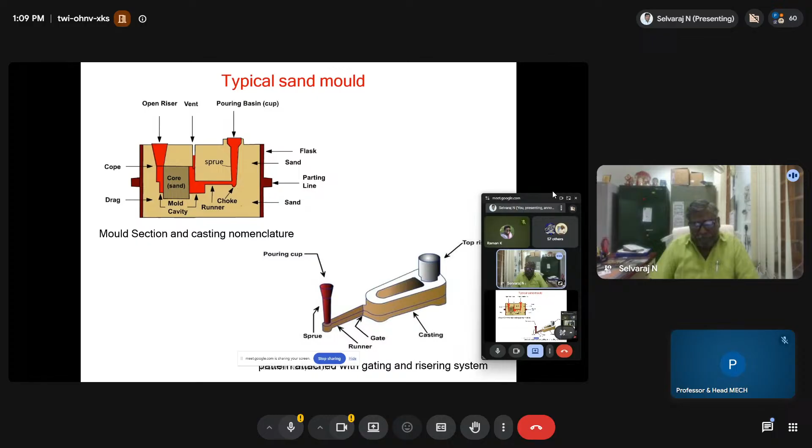As you know, this is the fundamental of the casting process. But the casting process has some drawbacks and some advantages also. These are some of the products which are produced by mold casting. The main advantage is that molten metal can flow into very small sections, so intricate shapes, even at a very micro level, can be made. As a result, many other operations are not needed. It is practically useful for ferrous and non-ferrous metals.

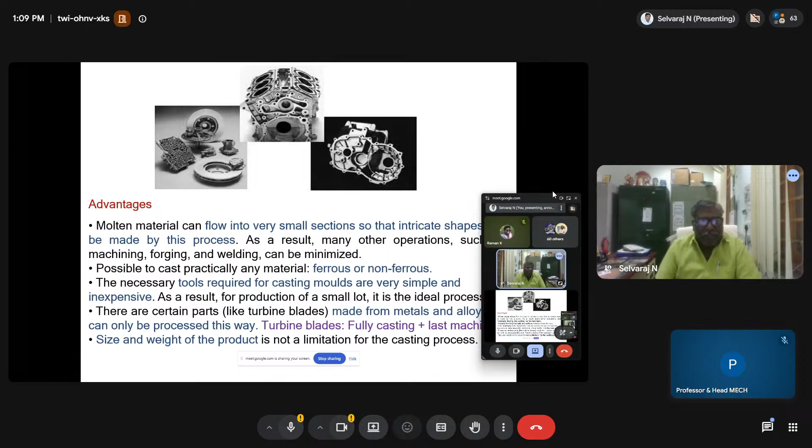The necessary tools required for the casting mold are very simple and inexpensive, which are the main advantages. And we are able to produce many applications. Mainly, see the diagram: some of the turbines are made by the casting process also. They have a lot of advantages. It has some drawbacks also. Mainly, the dimensional accuracy and surface finish may not be up to the mark.

Nowadays we are talking about the micron level and nano level, which we are not able to obtain from the casting process. Many new casting processes have been developed which take into consideration dimensional accuracy and surface finish. Some of these are the die casting process, investment casting process, vacuum sealed molding process, and other molding processes. So in order to overcome the limitations of the conventional casting process, scientists have developed some new techniques or advanced casting processes, which we are going to see in the coming slides.

So mainly we are concentrating on two latest processes called the stir casting process and the centrifugal casting process. There are certain drawbacks in the conventional process we have discussed just now. To overcome the limitations of the conventional process, people have developed this area. Let us see first what the stir casting process is. Generally, the stir casting process is useful when you are going to prepare specimens of composite material. That means more than one material.

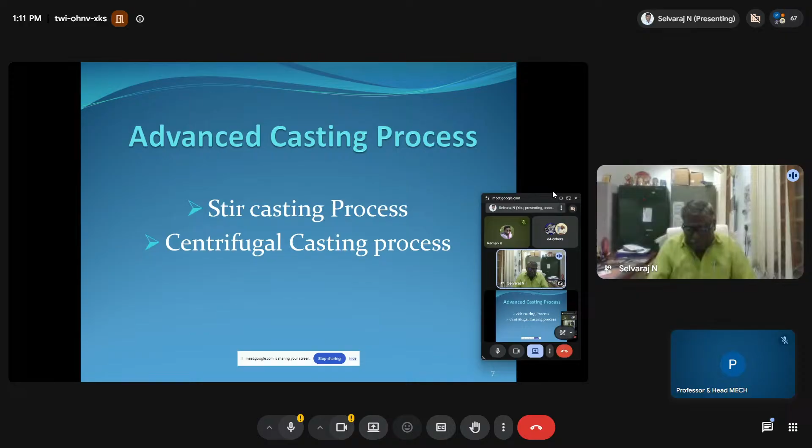So whenever you come across composite material, people go for this kind of process, the stir casting process or centrifugal casting process. If you have only one metal, any non-ferrous or ferrous metal, people used to develop the product from the conventional process. Whereas here, we make composite materials using the stir casting process, which we are going to see in the coming slides. Before we see what the stir casting process means and how we produce the specimen, let us see one or two slides on what we mean by composite materials.

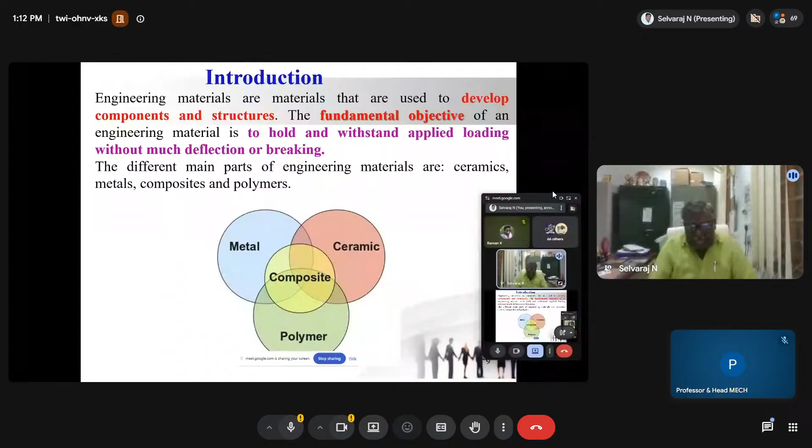Engineering materials are materials that are used to develop component structures. The fundamental objective of any engineering material is to hold and withstand applied loading without much deflection or breaking. Right? For ceramics, metals, composites, and polymers. So we see in the diagram metals, ceramics, polymers, and their combination, composite materials. So a composite material is nothing but a combination of more than one material, prepared with the help of a matrix: metal matrix, polymer matrix, or ceramic matrix. If you choose a polymer matrix, there are two subdivisions, namely thermoplastic matrix and thermoset matrix.

Composite materials are classified based on reinforcement: structural, fiber reinforcement, and particle reinforcement. Structural reinforcement is generally in terms of laminate and sandwich. In laminate, layers are placed one after another. In fiber reinforcement you have continuous and discontinuous. In particle reinforcement you have large and dispersed particles. So you can classify composite materials based on the matrix or based on reinforcement.

So what do you mean by composite material? In the classification you see metal matrix, ceramic, and polymer. Metal matrix will have metal as the matrix material and the reinforcement as a ceramic or organic component. Whereas ceramic matrix has ceramic as the matrix material with metallic reinforcement. Coming to polymer matrix, we have polymer as the matrix material and the reinforcement is in terms of fiber or particles.

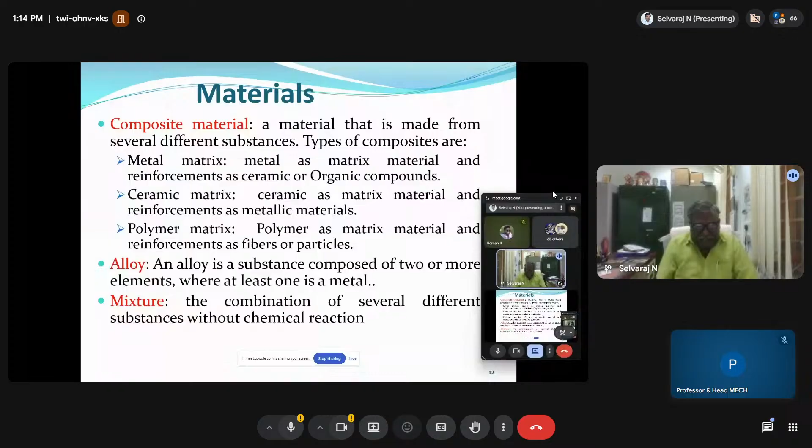Whereas in a composite material, the matrix is a monolithic material into which the reinforcement is embedded and is completely continuous. Reinforcement material is embedded into the matrix. So that is the basic difference between these two.

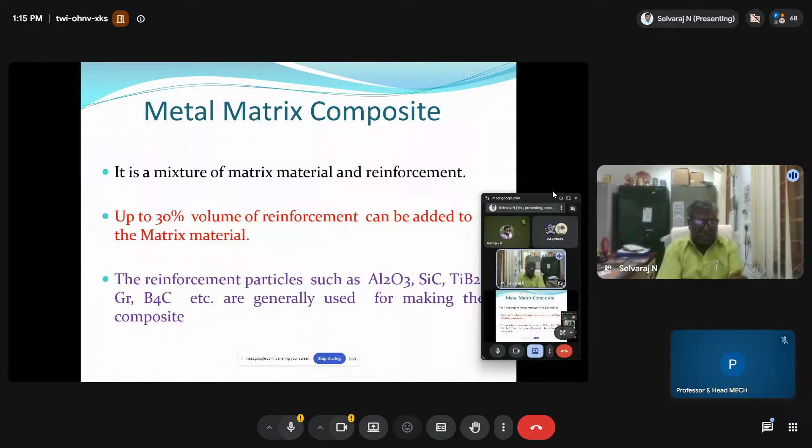Now coming to metal matrix composites, up to 30% volume reinforcement can be added to the metal, up to 30% only. 70% generally is base metal, maximum 30% can be added as reinforcement. The reinforcement materials are generally aluminum oxide, silicon carbide, titanium diboride, graphite, boron carbide.

When at least three materials are present, it is called a hybrid material. Generally they have two materials, one is the base metal and another material, that is called a composite material. But if you have more than two, three materials, then it is called a hybrid composite.

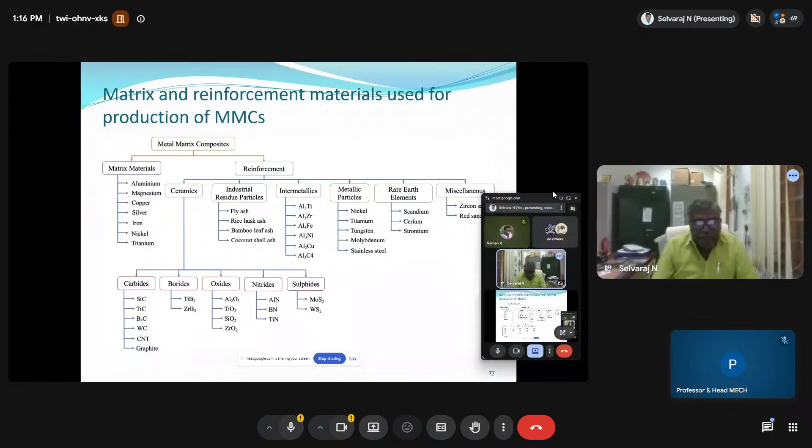This is a generalized classification of metal matrix composites. Based on the matrix we have aluminum, magnesium, copper matrix, and for the reinforcement we have ceramic, intermetallic, metallic particles, elements, rare earth elements, miscellaneous, etc. Coming to ceramics, again there is some classification: carbide, boride, oxide, nitride, and sulfide. These are some of the materials which are used in MMC.

So the main difference between an alloy and a composite lies in their composition, structure, and how the constituent materials are combined. An alloy is a homogeneous mixture of two or more elements, where at least one must be a metal. The elements are combined at the atomic level, usually by melting them together. Alloys typically form a single solid phase, where atoms of the different elements are uniformly distributed through the material.

Whereas a composite material is a heterogeneous material made of two or more distinct materials known as phases. They remain separate and retain their original properties in the final product. The properties are not lost when combining them. By combining the individual properties, we finally get enhanced strength and overall properties. That is the main advantage of composite material. The components do not dissolve in each other, but instead combine to achieve improved properties like strength, toughness, and light weight. That is the basic difference between composites and alloys.

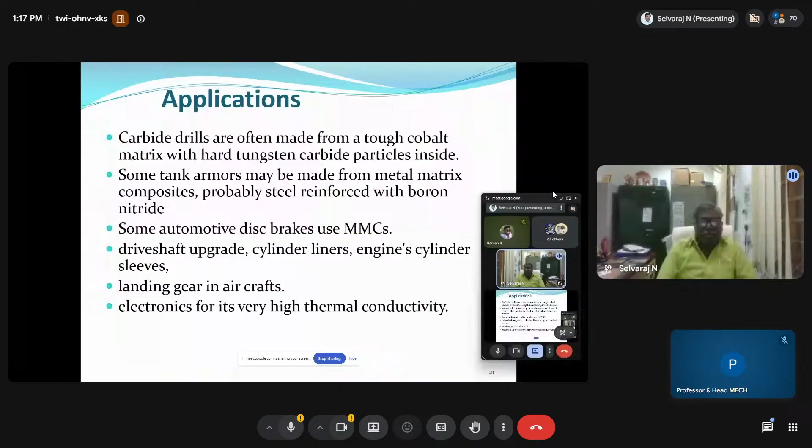Now, assuming that we know what is meant by MMC, how are we going to prepare the MMC in the stir casting process? In the liquid state process, we have casting and infiltration. Stir casting: discontinuous reinforcement is stirred into the molten metal, which is allowed to solidify. Squeeze casting: molten metal injected into the form with the fiber preplaced inside. Spray deposition: molten metal sprayed onto a continuous fiber substrate. Reactive processing: chemical reactions. So we have nearly 4 or 5 methods to prepare the specimen, but today we concentrate on the first, the stir casting process.

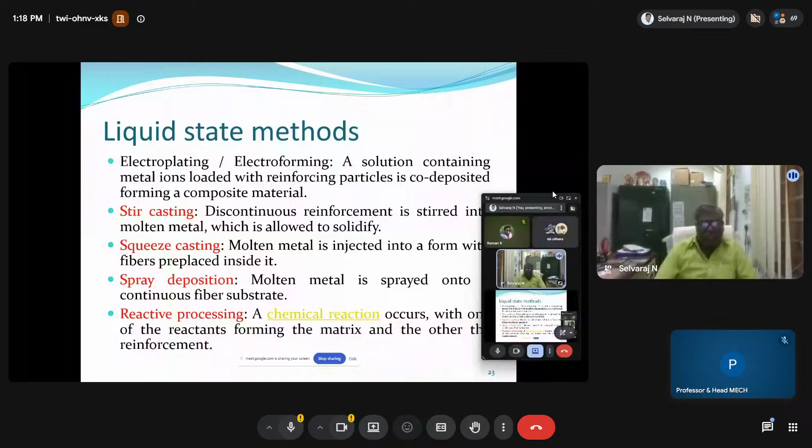Okay. If it is not audible to the audience, please tell me so that I will recheck it once again. I think it is audible. Please respond. Yes, sir, it is audible, sir. Okay, thank you, thank you.

Stir casting is a liquid state method of composite material fabrication in which a dispersed phase, ceramic particles or short fibers, is mixed with the molten matrix metal by means of mechanical stirring. It was developed in 1968 by S. Ray. As I said, with base metal and reinforcement, a maximum of 30% volume reinforcement is permitted.

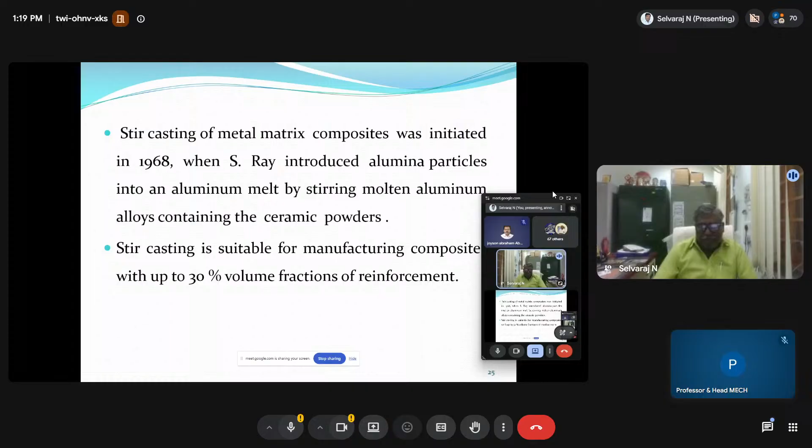This is one photograph. The left side, this is the right side. This is a stir casting machine, which is available in our lab, NIT Warangal.

So, you see the right side, this is the enlarged diagram of the stir casting machine, where we are pouring the molten metal. The matrix we pour inside first, right? After some time, we pour the reinforcement material through the chimney. Inside, there is a stirrer.

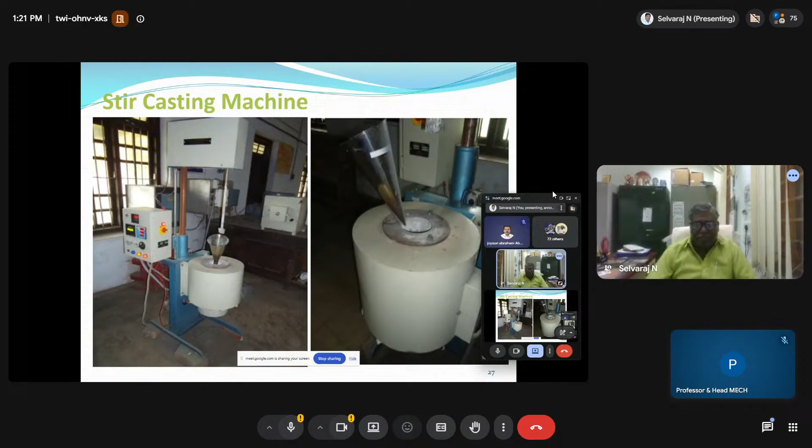You see the left side, there is a device called a stirrer, which goes inside and rotates, so the reinforcement particles are uniformly distributed in the matrix continuously. After some time, it is allowed to solidify at room temperature, and finally we get the final product. So this is a schematic diagram of the stir casting process.

In the furnace, the aluminum will be melted to the molten state. Later, switch on the motor for the stirrer. The shaft will start rotating vertically. By that time, we pour the reinforcement particles slowly through the particle injection chamber into the aluminum molten metal, so that because the shaft is rotating, the stirrer

also rotates continuously. The reinforcement particles are slowly distributed among the base metal, that is aluminum. After some time, it is allowed to solidify at room temperature, and finally we get the final product that should be removed. This is a closed chamber.

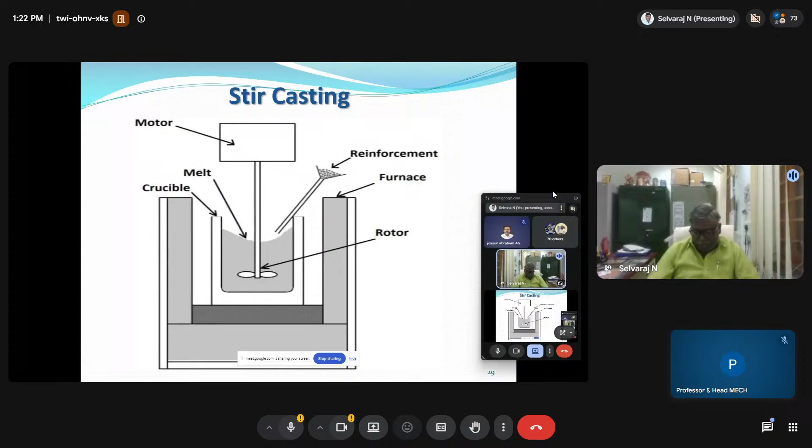You see the motor, crucible and melt, the reinforcement material through the chimney, the furnace and rotor. The rotor rotates with the help of the motor, distributing the reinforcement particles continuously in this chamber. Right. For mixing the metal and reinforcement, there are two methods: the one-step mixing process and the two-step mixing process. Yes.

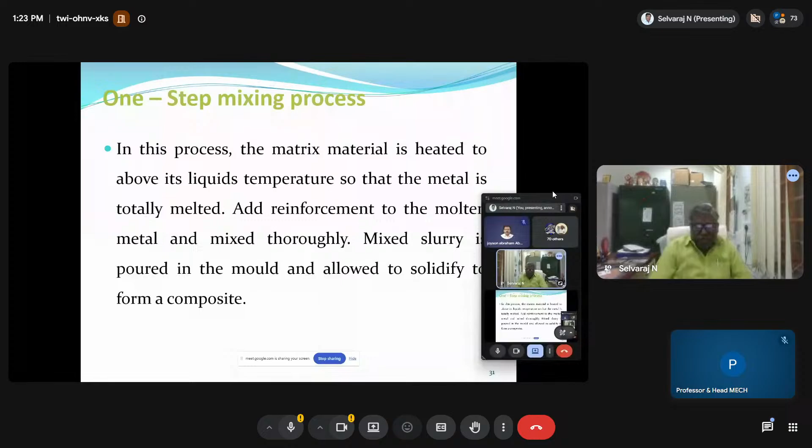What is the one-step mixing process? The metal matrix is heated above the liquidus temperature so that the metal is totally melted. Then the reinforcement is added to the molten metal and mixed thoroughly. The mixture is poured into the mold and allowed to solidify at room temperature. That is what we have discussed.

Two-step. In this process, the matrix is heated above the liquidus temperature so that the metal is totally melted. The metal is then cooled down to a temperature between the liquidus and solidus points to keep a semi-solid state. Earlier it was fully liquid; here we keep a semi-solid state. That is called two-step mixing. At this stage, the preheated particles are added and mixed.

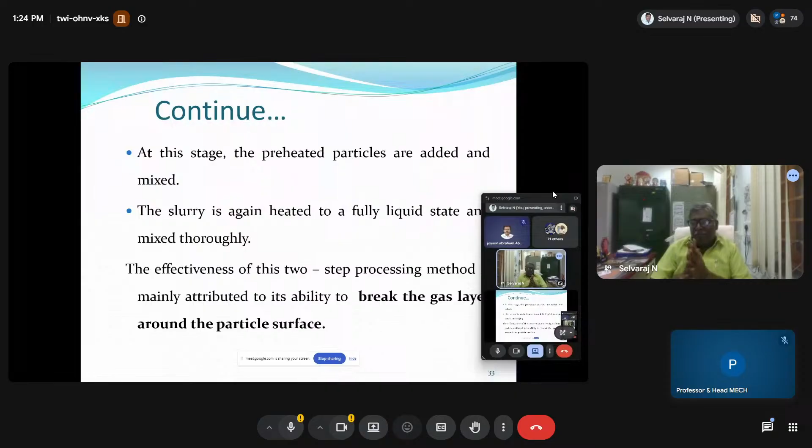The slurry is again heated to a fully liquid state and mixed thoroughly. The effectiveness of the two-step method is mainly attributed to breaking the gas layer around the particles. In the one-step method, the gas layer will not break. Whereas here, the gas layer breaks, so the particles mix further with the base metal, and you get uniform distribution. That is the main advantage of the two-step method.

In the stir casting process, the gas layer around the particle surface refers to the thin layer of gas that can form around the particle when it comes in contact with the molten metal. This gas layer can hinder the proper wetting of the particle by the molten metal, which is crucial for achieving good bonding between the particle and metal. That is the main advantage: good bonding between the base metal and the reinforcement materials. The bonding may not be available in the one-step method.

So this is the latest development. To overcome this, the stirring process often involves mechanical stirring to break the gas layer, allowing the molten metal to come into direct contact with the particles. It will ensure uniform distribution of particles and improve the overall quality of the composite material. That is the main advantage of the two-step stir casting process.

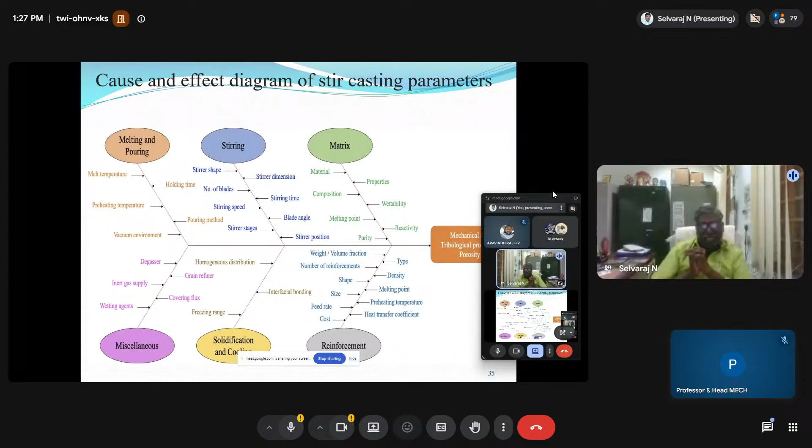If you compare miscellaneous factors also - inert gas supply, wetting agent, covering flux, grain refinement, etc. - this is very much useful when you are going for research purposes.

Factors affecting successful fabrication of MMC. Let us discuss the same things in another way: stirring speed, stirring temperature, stirring time - these are the factors affecting fabrication. Also preheat temperature of the reinforced particle and hold temperature.

Difficulty of achieving uniform distribution of reinforced material - when you start rotating the stirring blade, we assume that the reinforced particle is uniformly distributed in the base metal, but that may not actually happen. So researchers later developed one more method called ultrasonic stir casting process. What we discussed earlier is called conventional stir casting process. With the ultrasonic stir casting method as the next development, we are able to get uniform distribution of reinforced particles in the matrix.

Compatibility between the two main substances and the matrix is another factor. Porosity in the cast material is also a variable - people are trying to reduce porosity, which is a challenging work. Chemical reaction between the reinforced material and the base material is another issue - sometimes we use more than two materials, that is called hybrid material, and sometimes the reinforced material may take part in chemical reaction, maybe not 100%, but 5% or 10%, which is also not good. These are the factors and challenges of research work in this area.

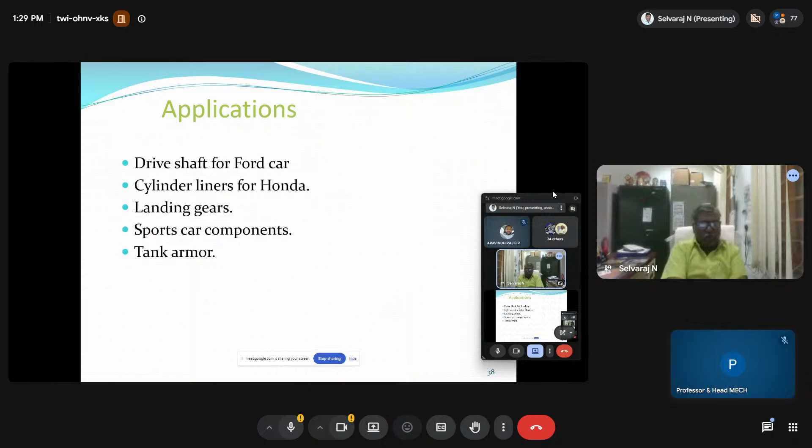Applications - I found them very limited, but actually quite vast: exclusively drive shafts for Ford cars, cylinder liners for Honda, landing gears for airplanes, sports car components, and tank armor for defense, etc.

So there are some challenges we have discussed in the stir casting process. Now, to overcome those challenges, people developed another casting method called liquid metal forging. To overcome disadvantages of stir casting like porosity, it is proposed to have molten metal solidified under pressure within a closed die position between the plate and hydraulic plate. Earlier, after pouring the reinforced material into the base metal, the mold stays open, but here the molten metal is solidified within a closed container, so porosity is controlled to some extent. This method is mainly meant for non-ferrous materials like aluminum, magnesium, copper, and pure ferrous material like grey cast iron.

So what is squeeze casting? Let us look at the diagram. In Figure A, there is a punch, die, and induction furnace. In Figure B, on the right side, molten metal is transferred into the die cavity. Earlier it was open, whereas here we have a die cavity into which molten metal is poured, so the die cavity is completely closed from the atmosphere, allowing us to control the process to some extent.

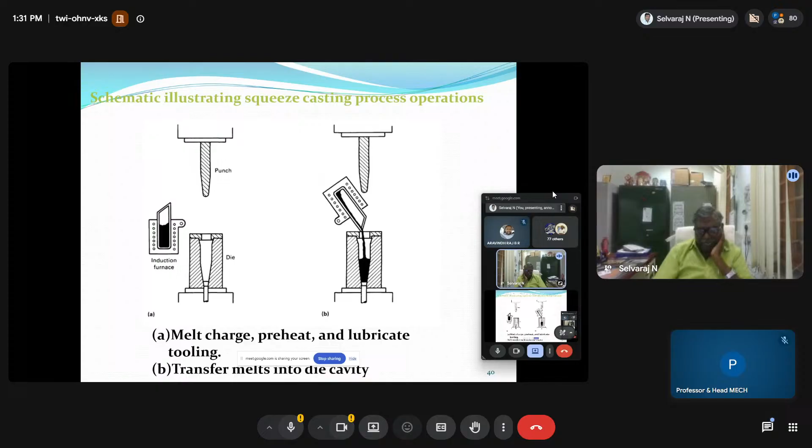The left side diagram shows the state without pouring metal, where punch and die are independent, and we have a furnace containing molten metal which is poured into the right side die. Next, closing the tooling die solidifies the metal under pressure - the molten metal solidifies under punch pressure. The punch moves downward gradually and slowly, piercing the molten metal to some extent, allowing it to solidify under punch pressure. After some time, in the casting process, as shown in diagram D, when the punch is removed from the die using the ejecting device, the casting comes out, giving us the final product.

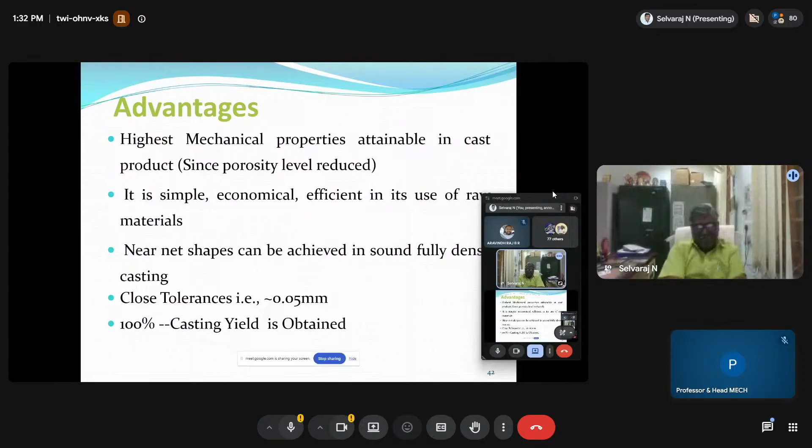What are the advantages of this process? The highest mechanical properties are attained, higher than in stir casting process. It is simple, economical, and efficient, used for raw materials. Near net shape can be achieved, almost dimensionally accurate, with close tolerance in the order of 0.05 mm. 100% casting yield is obtained here, which is the main advantage of this process.

Applications - these are recent advancements. We are having stir casting process with ultrasonic assistance, as already explained. Stir casting has been modified with ultrasonic vibration to promote better dispersion of reinforced material, meaning the reinforced material achieves uniform dispersion across the metal matrix. Another process is called in-situ reinforcement formation - advanced casting techniques now allow use of these newer formations.

That's the centrifugal casting, we are going to see this. Then 3D printing, additive manufacturing, that also we are going to see now.

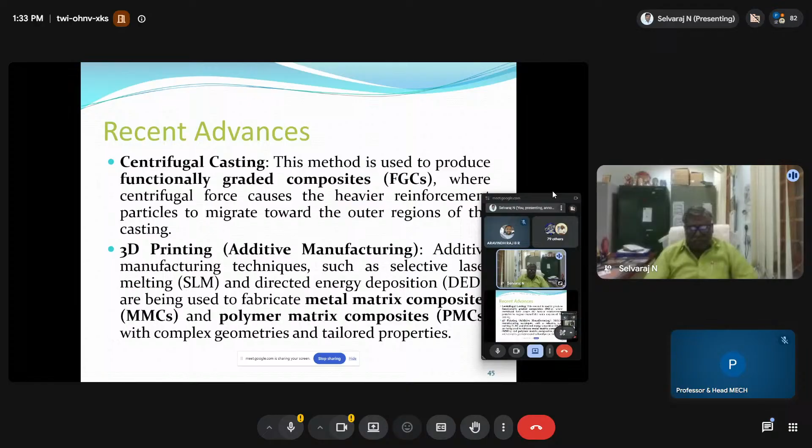Microwave casting - these are the latest developments other than stir casting process. Microwave sintering also - about sintering, there are some powder metallurgy sintering processes. These are specimens where we are able to get the product conventionally. The next development in sintering is microwave sintering process, and spark plasma sintering operations.

Coming to the next topic, centrifugal casting. If you see centrifugal casting, how we are going to use it with functionally graded material - another latest material called composite material. In stir casting process, we are producing composite material specimens, whereas in centrifugal casting we are going to get functionally graded material as a specimen, using centrifugal force.

Sir? Hello? Hello, sir?

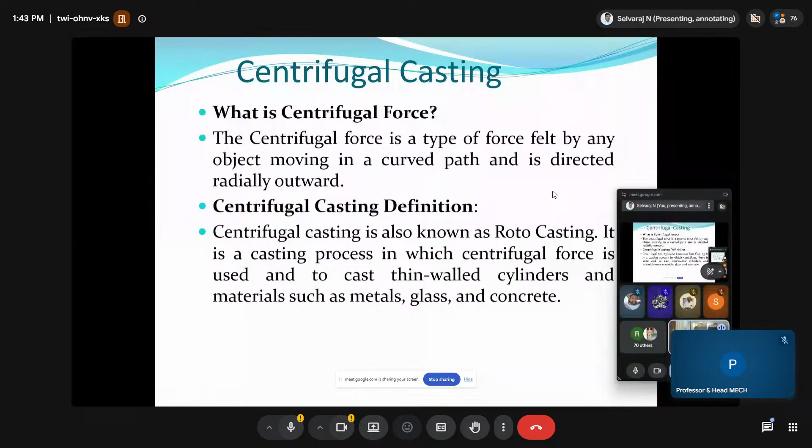Centrifugal casting, also known as rotocasting, is a casting process in which centrifugal force is used to cast thin walled cylinders of metal, such as metals, glass, and concrete.

In true centrifugal casting, the mold is rotated upon the horizontal or vertical axis, and the molten metal is held against the walls by the centrifugal force while it solidifies at room temperature. True centrifugal casting is mainly used for production of cylindrical hollow parts - that is the main advantage. Centrifugal force is generally used to produce cylindrical hollow parts only.

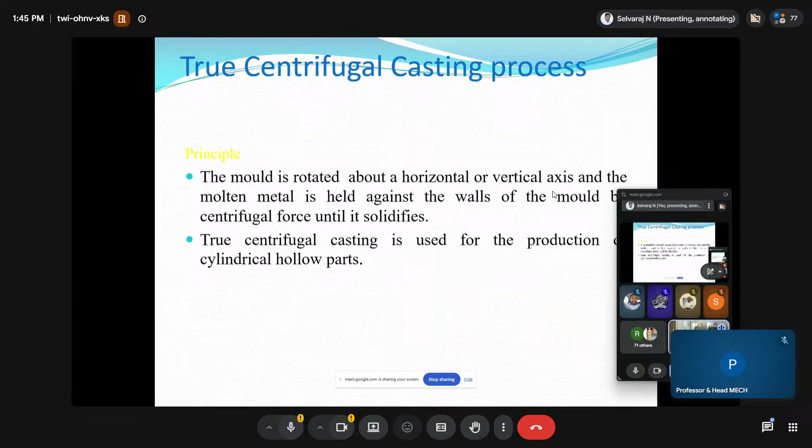This is a diagram I will show you - this is the cross section diagram of centrifugal casting. I'd like to show a video clipping so it is easy to understand.

But the audio may not be available.

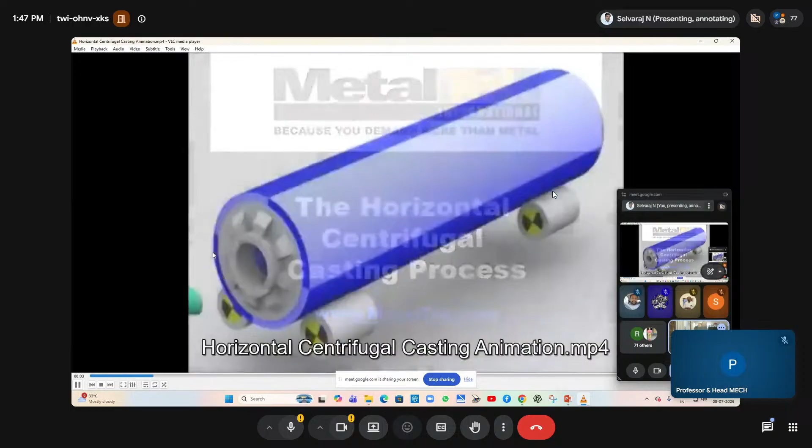Audio mode may not be visible, just see the diagrams. Yes sir, it is visible sir, and also audible.

But even with animation, this horizontal centrifugal casting creates the final product as a hollow one, generally meant for only cylindrical parts.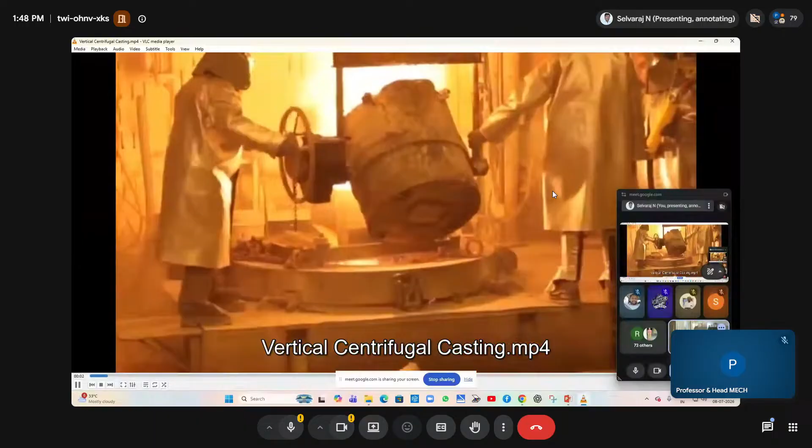This is another vertical centrifugal casting - original video footage from the industry. These are its applications.

And so one more video that is for what you call the semi-centrifugal casting process.

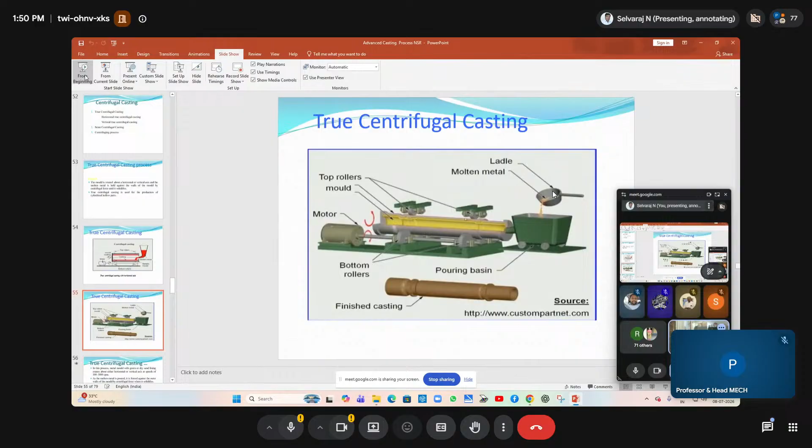So from the video clippings, you can understand how centrifugal casting is able to get the final product.

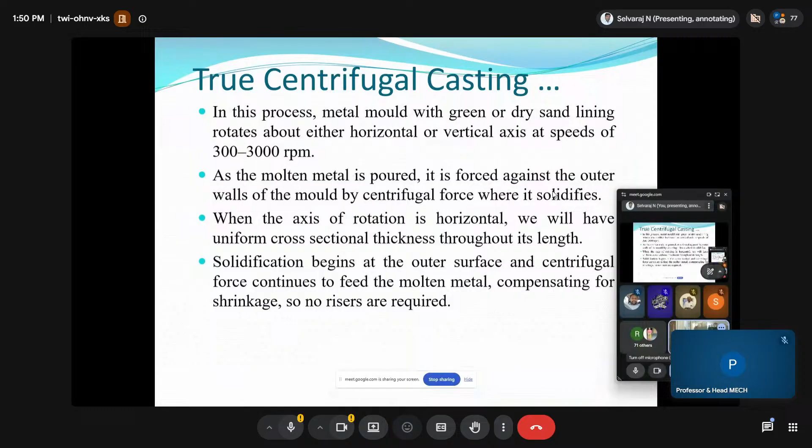So these are the parameters of centrifugal casting. This is vertical centrifugal casting. When the axis is vertical, the section is thicker, and the inner diameter will not be uniform, whereas the outer diameter will be uniform. Whenever you want to make any conical shape or hollow cylinder, you can go for this kind of process.

The molten metal enters the mold through the central pouring basin. The central reservoir acts as a riser and must be large enough to assure that it will be the last metal to freeze. Since the lighter impurities concentrate in the center, this process is best used for castings where the central region is ultimately hollow.

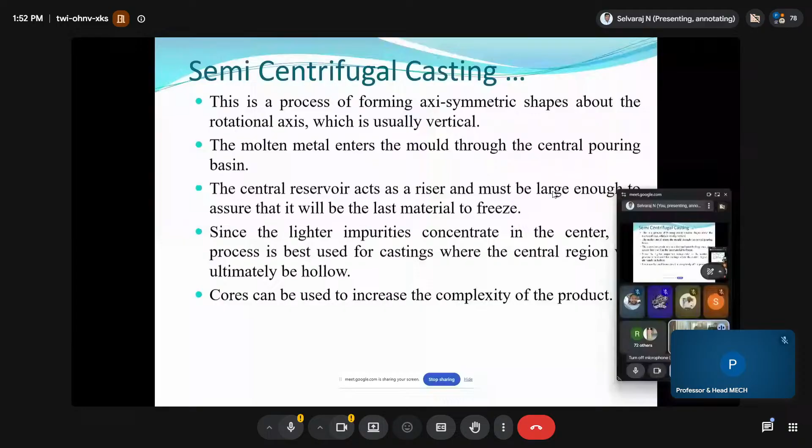Cores can be used to increase the complexity of the product. Whenever you want to make a hollow casting product, you keep the core material, like sand material. Here also, we can use the core to get a complex shape.

We see the top view and front view. The bottom is called the front view, and the top is called the top view. In the top view, there are 1, 2, 3, 4, 5 - five products you can get at a time.

All are symmetrical shapes. So when you see the front view, there will be a center gate, a reservoir for feeding, and the casting core. On the left side, you see flask, drag, and core.

Like our conventional casting process, we have cope and drag, and we have flask also. So in this casting process, we are going to get 5 different cylindrical castings. We have hollow sections with the help of the core. So from the center gate, you pour the molten metal.

The molten metal fills the cavity, all 5 through the gates uniformly and with uniform size. So we allow it on a rotating table. After that, the entire table rotates about the vertical axis. That's the main advantage - when you rotate about the vertical axis, we are able to get all the products uniformly with uniform thickness. Finally, we are able to get the final product.

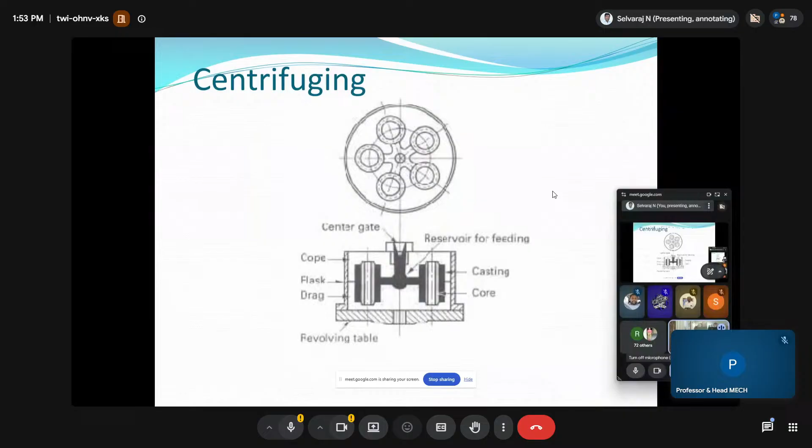They are called centrifuging castings. They use the centrifugal action to flow the metal from the central core reservoir. There is only one runner, which is called a reservoir here. There is only one central core reservoir to separate the mold cavity, offset from the axial rotation.

Several identical smaller molds are located radially above the vertically arranged central sprue. These are similar identical products. They are arranged vertically with a common central sprue.

The centrifugal action forces the molten metal from the central reservoir into all the molds through a number of radial gates. The entire mold rotates about the vertical axis with its central sprue. This is another form of centrifugation.

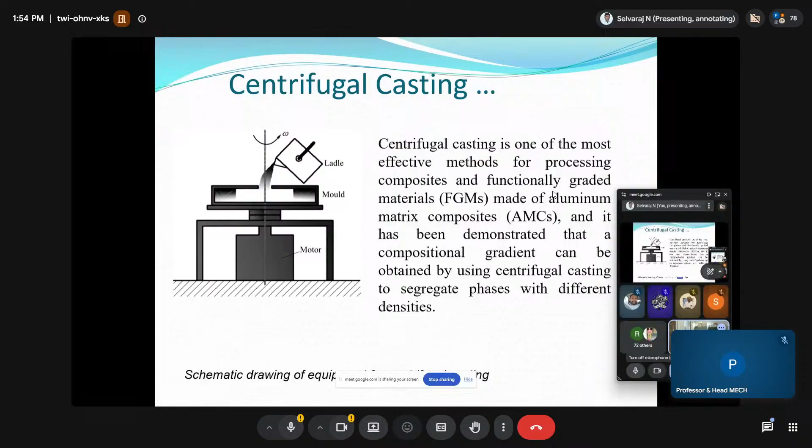Centrifugal casting - right, now how are we going to take the functionally graded material? Here in centrifugal casting, we are using a material called functionally graded material. What do we mean by functionally graded material? You will see this first.

These are the centrifugal casting method process steps involved, the limitations, advantages, and applications. Let us see what we mean by functionally graded material.

We have seen composite material first, now functionally graded material. FGM are engineering materials that are inhomogeneous and can be purposefully processed to obtain discrete and continuously varying composition and microstructure, with a definable geometrical length. Purposefully - that is a very important word. We have inhomogeneous material, purposefully and procedurally obtained with discrete and continuously varying composition and microstructure over the length.

FGM can be used in a number of applications such as aircraft, combustion nozzles, gas turbines, energy conversion cells, biomedical, etc. Based on the processing route, different fabrication methods are available, such as powder metallurgy, centrifugal casting, friction stir casting, and self-propagating high-temperature synthesis. The ceramic phase dominates the vicinity of the hot surface, which is dominant here.

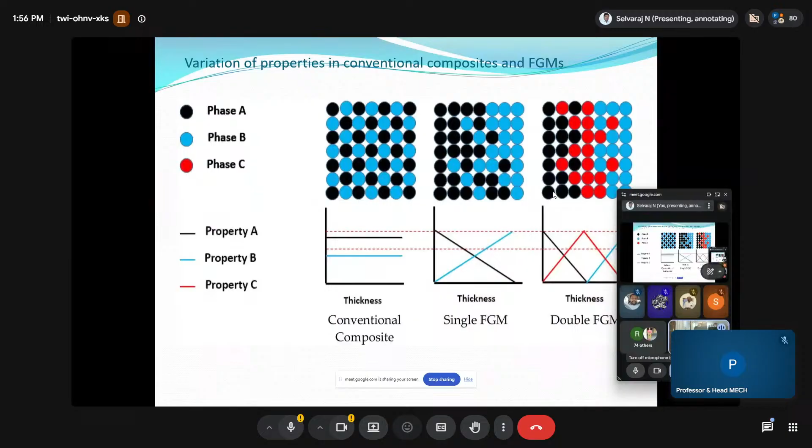The third one is called double FGM. So when you go on increasing FGM, double, triple, we enhance the property of the materials. Right. So by using the centrifugal casting method, we get the final product, the material called FGM. This is the block diagram of how we get the product by using centrifugal

casting. So these are some of the examples of FGMs: metal to metal, metal to ceramics, ceramic to ceramics, and ceramic to polymers. Metal to metal: aluminum copper, aluminum nickel, nickel titanium. Metal to ceramic: aluminum silicon carbide, aluminum oxide, nickel zirconium oxide. Ceramic to ceramic: silicon carbide carbon, silicon carbide to silicon carbide, carbon to carbon. Whereas polymer, we have glass epoxy and carbon epoxy.

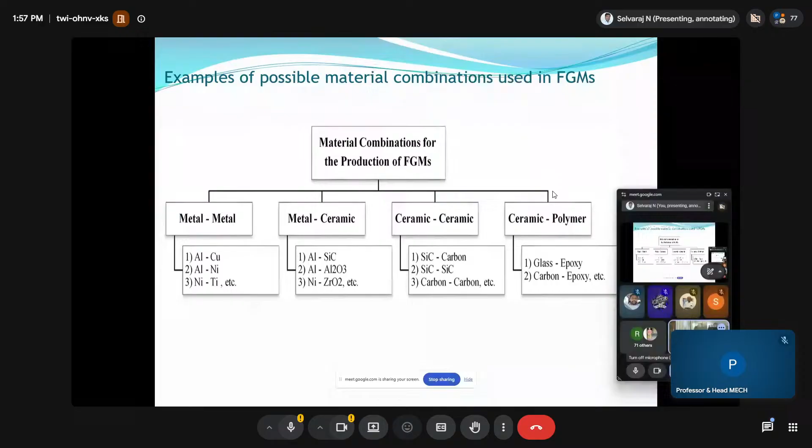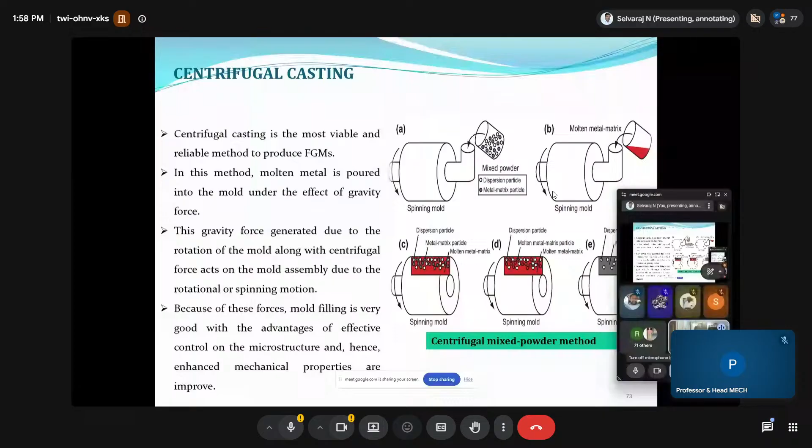Application areas are aerospace, manufacturing, automotive applications, defense applications. This is the common technique used for production of FGM. You see the left side, first one, the centrifugal casting: centrifugal casting of mixed powder and centrifugal slurry. The diagram shows the various stages, how we get the final product, how we get the FGM materials by centrifugal casting, shown here.

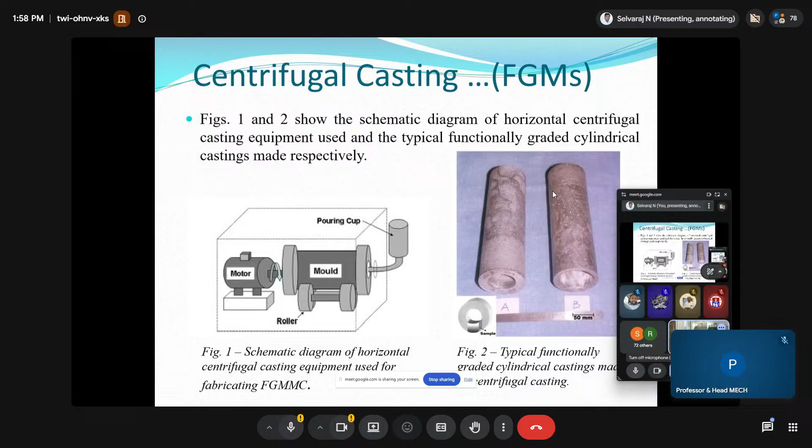Then, if time permits, Professor. Professor, shall I continue or should we stop now? Yes, sir. Your wish, sir. Okay, I will touch upon another topic for 10-20 minutes. Yes, sir. Another topic. Okay, sir.

This was about casting. Now coming to the next, I would like to touch upon the welding process. Right. Another 15 to 20 minutes, then we stop, because it's a very big topic. It's our pleasure, sir. Carry on, sir. Okay, right. So far it was casting, advanced casting. Next, advanced welding process. Here also, you know what I mean by welding.

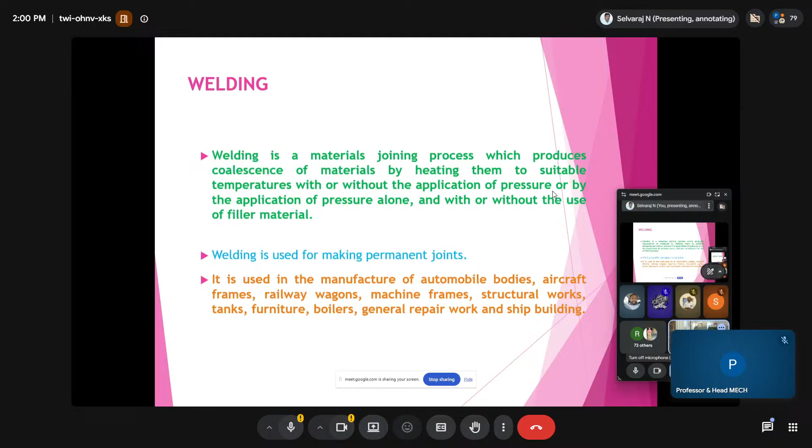Now, advanced welding: friction welding process, inertia friction welding process, laser beam welding process, hybrid laser beam welding process, wire arc additive manufacturing. I'd like to touch upon only a few welding processes. Friction welding process. Friction welding is one of the advanced welding processes; it is a solid state joining process that produces coalescence by the heat developed between two surfaces by mechanically induced surface motion.

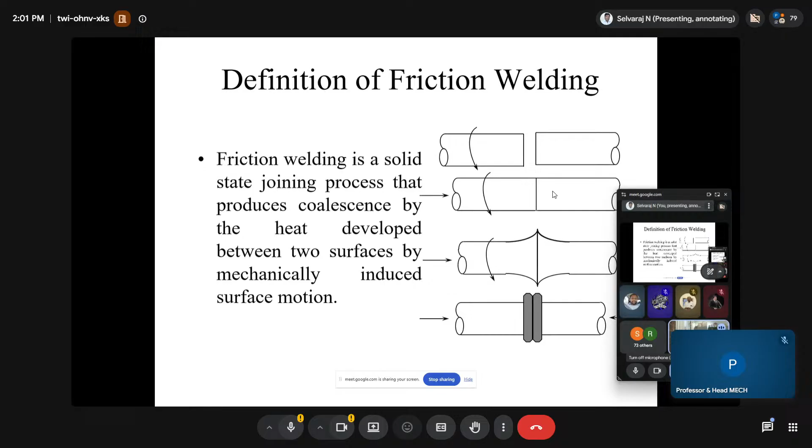See that one. There are two surfaces, two metals, which are in direct contact with each other. One is rotary. With the rotation of the surface, friction develops between the two solids, and finally you get the weld. See the diagram. There is a motor, a brake, spindle, chuck. See the right side: two workpieces, non-rotating vise, hydraulic cylinder. The right side workpiece will not rotate. The left side workpiece rotates with the help of the motor, and it moves towards the other.

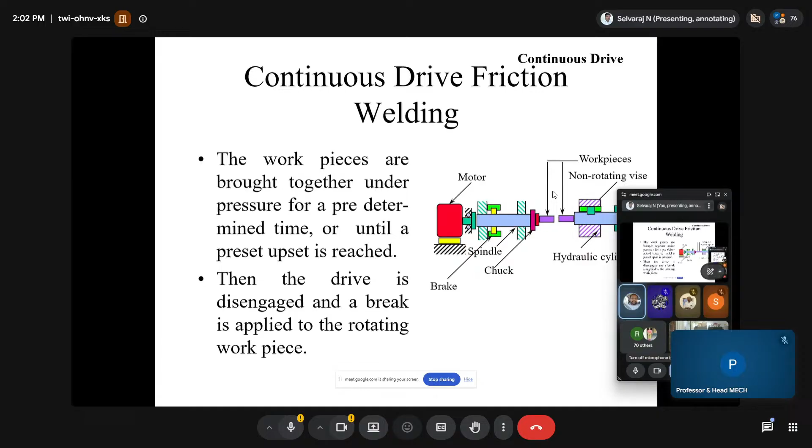When both surfaces contact directly, due to friction between these two, heat develops. Due to the heat, softening takes place. Slowly it cools to room temperature, so that these two materials are joined in the solid state. One of the workpieces is attached to the rotating motor drive, and the other is fixed in an axial motion system. The workpiece is rotated at constant speed by the motor. The axial force is applied. The workpieces are brought together under pressure for a predetermined time, or until a preset upset is reached. Then the drive is disengaged and the brake is applied to the rotating workpiece.

Joint design for friction welding is the same as flash butt welding, designed in the same manner. I'll show you that.

I will show you this friction stir welding process. Stir welding, see that one. See, this is the friction stir welding one we discussed now.

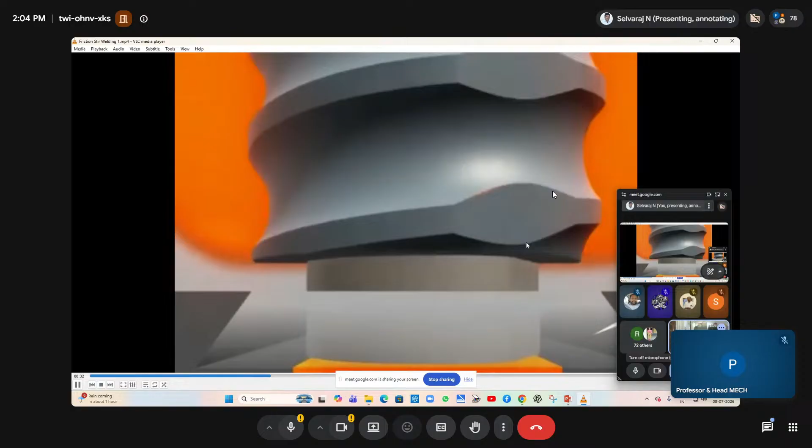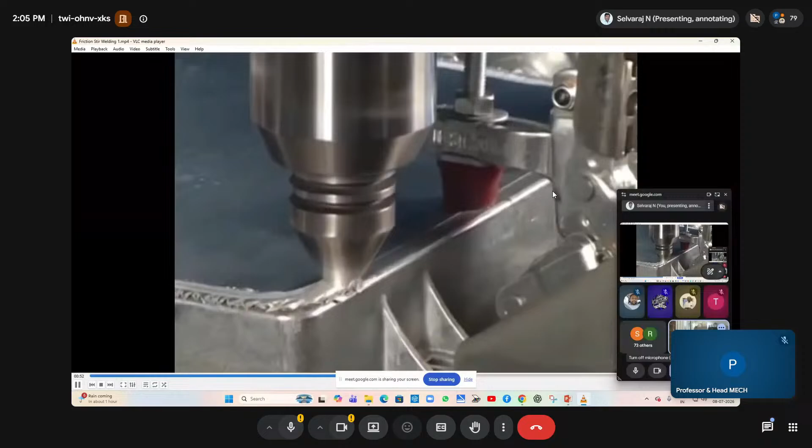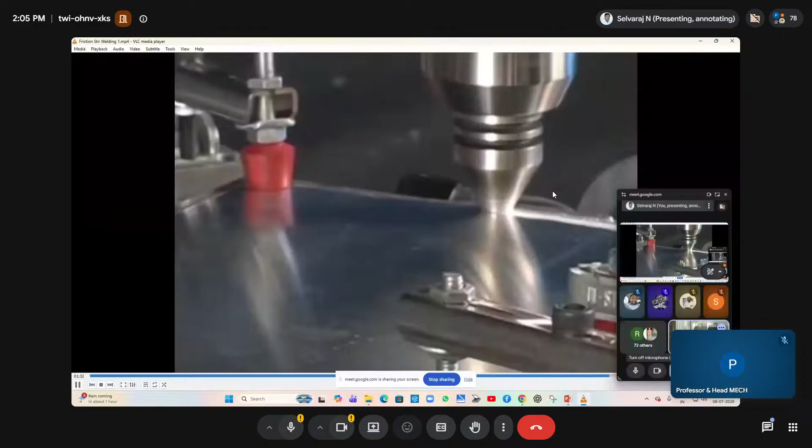Vertical one. This is the original diagram. How is the welding taking place? So, one more diagram.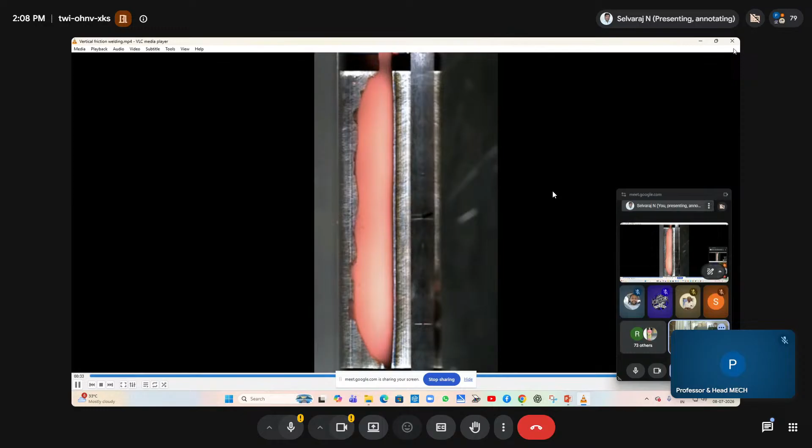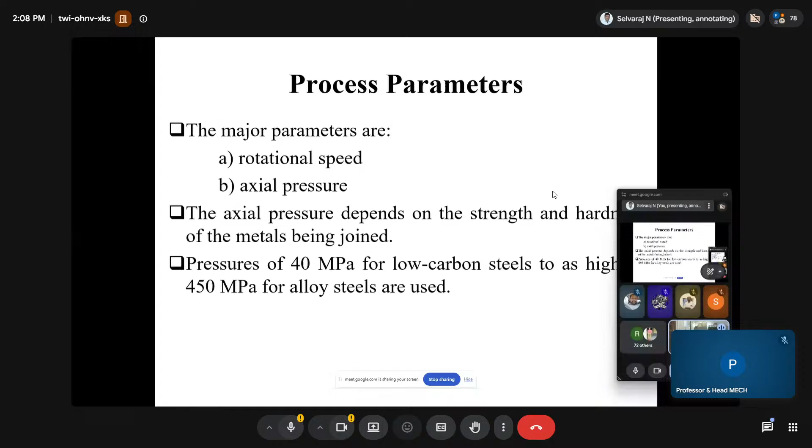So the process: the rotating speed, axial pressure, how you are applying the pressure, how much you are applying. The axial pressure depends on the strength and hardness of the material to be joined. These are some of the values, depending upon the materials: heating pressure, forging pressure, and the time also.

You come to the headstock, tail stock side, remove that dead center and keep another workpiece which is stationary, so that through this headstock can move in the forward direction, there will be a surface contact between this metal. Apply the load through this horizontally, we will be able to get the final product. So many people are doing friction welding with the help of a simple lathe itself. These are some of the advantages.

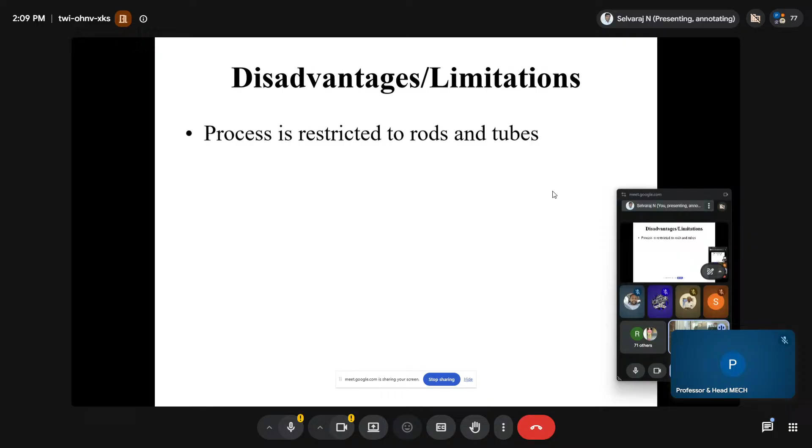There are some drawbacks. They restrict to only rod and tube. Tube welding is very complicated because there are chances of bending, because the wall thickness is very small. We cannot go for welding. The wall thickness should be higher. This is used for only small parts. The headstock takes the distance dimension. With the dimension you are able to go for small products only.

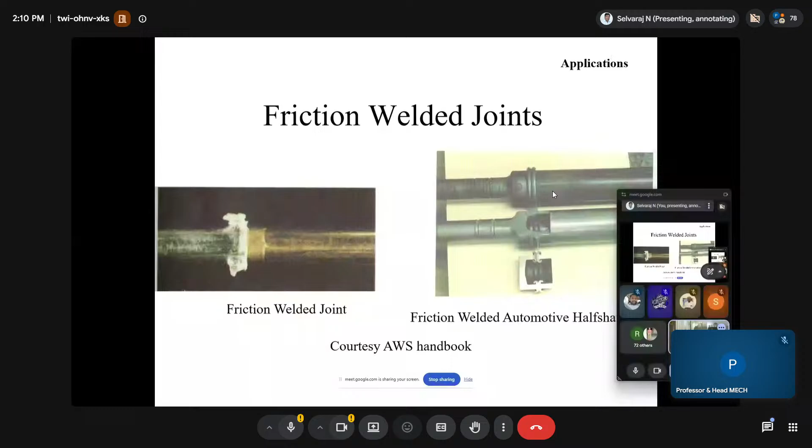These are the applications. What we have shown so far, friction welding photographs. These are some of the products which are obtained from friction welding. This is called linear one. That is called a circular part. Here, the linear one, they join it together with butt joints. These are some of the applications.

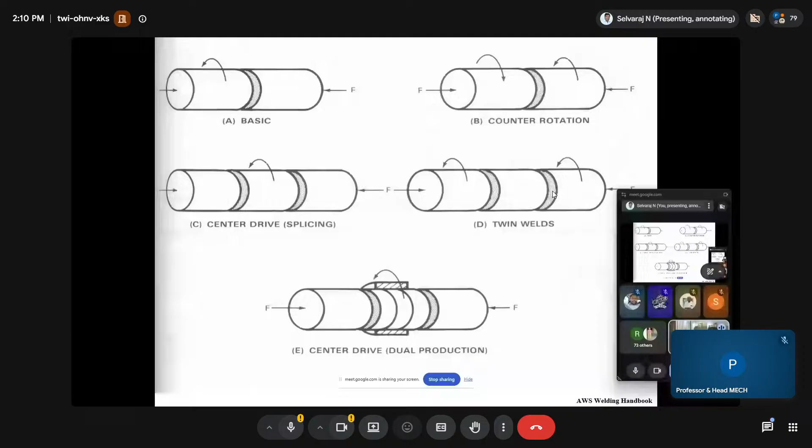So I will show the linear friction welding. One is stationary, one is movable. Both are working in vertical directions. There is something called a vibrating welding machine also. That is horizontal. The lower part is the frictional one, and the higher part is movable horizontally, so that we are able to get the final product. This is the radial thing we have discussed.